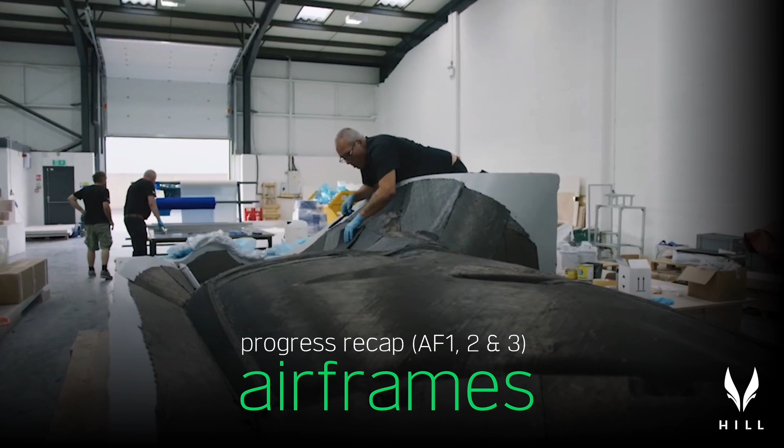So Airframe 1 was very much about making sure we could use Infusion to develop cost-effective composite aerostructures for HX50. That's key to unzipping the power of composites at a price point that GA can afford. So this first fuselage was about: can we stick the dry carbon fiber into the molds, can we hold it in place, and then can we distribute the resin around the mold effectively?

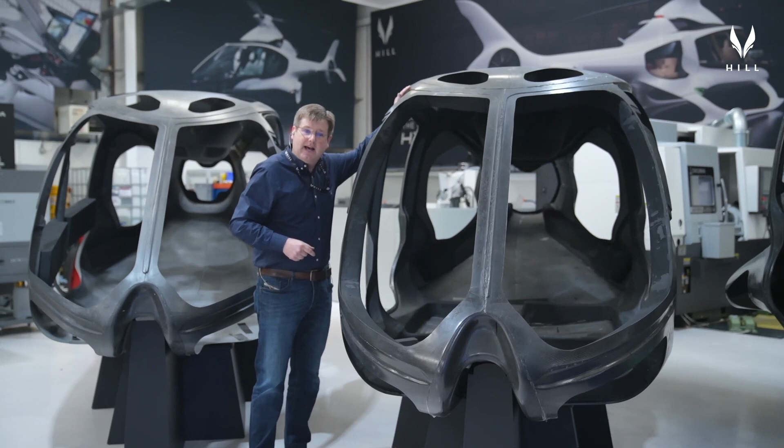We did that, and then with the second airframe, we moved on to try and improve the detail in the molding. So trying to resolve things like edge details, and starting to look at how we template and how we position the foams and the B surfaces into the mold.

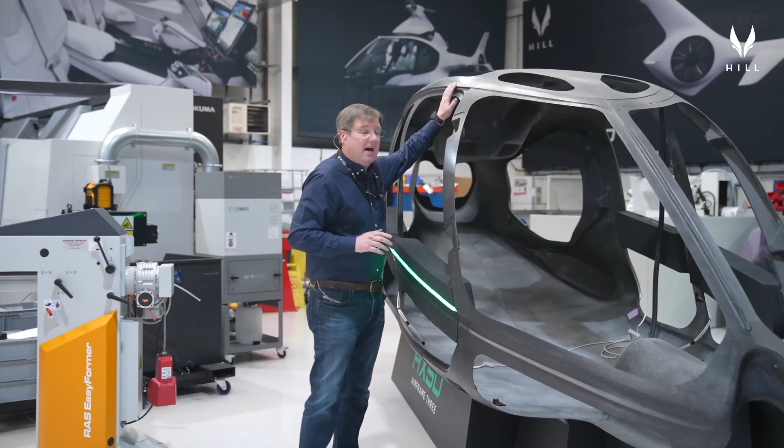The third airframe then allowed us to perfect that process on the outer skin. So by the time we'd got to the third one, we're resolving the edge details and all the intricacies of the carbon structure to production standards.

And then with Airframe 4, that was where we were due to bring all of the elements together. So let's go back and have a look at what we did with Airframe 4.

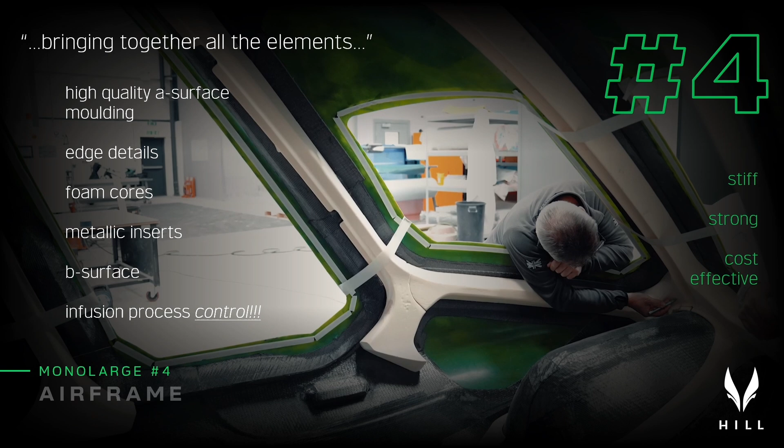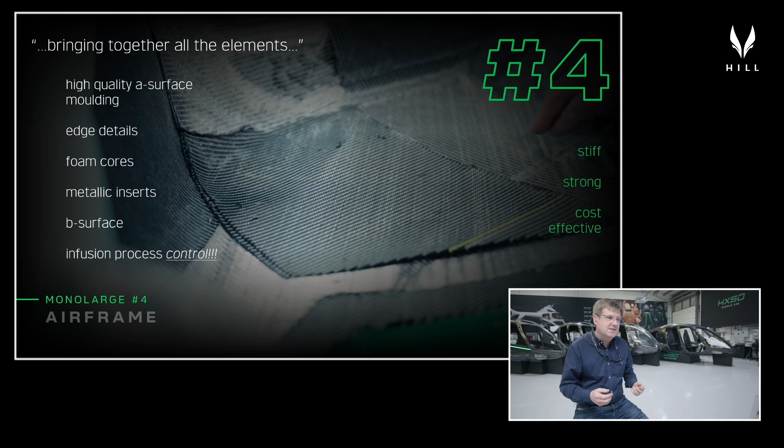So Airframe 4 really brought absolutely everything together, everything you needed to have a high quality, low cost aerostructure. All the edge details were in, all the foam cores were in, all the metallic inserts were in, the B surfaces were in there that give the structure its strength and stiffness, and then it was about perfecting the infusion control. We really refined the production processes to deliver what is a near perfect molding.

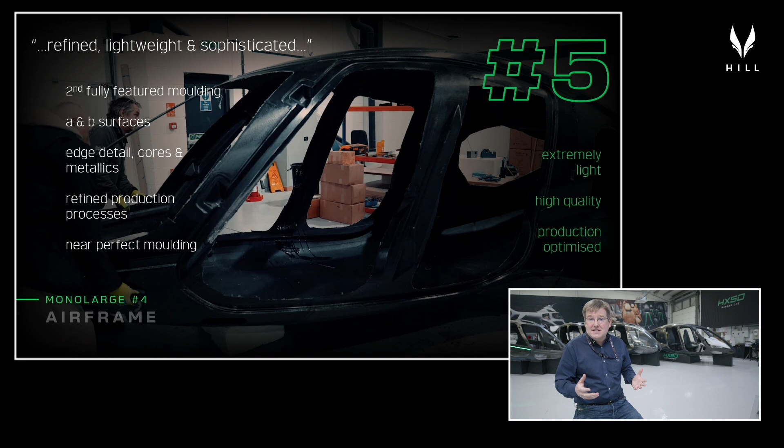And what we found when we got this out of the tool was this airframe is incredibly light. The whole monolarge with everything in there, the foam cores, the metallics, everything you need to attach all the mechanical components and whatnot is just 50 kilos.

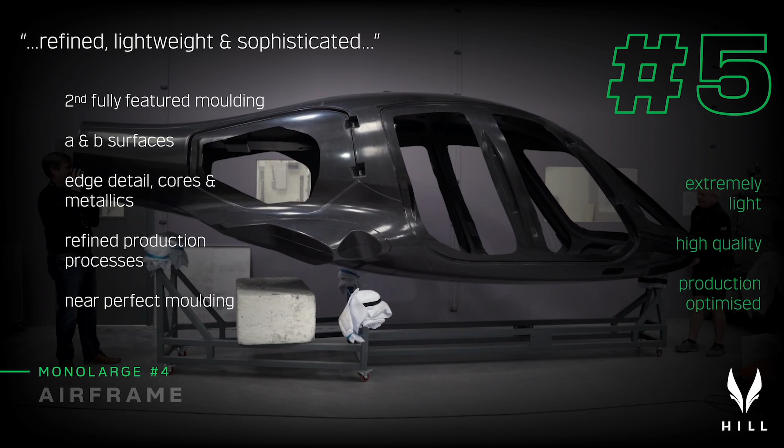Now, obviously it will put on more weight. We've got to bond in some internal panels to make the floors and the fuel tank closures. We've got to put doors and windows on it, but we are on track for weight, we are on track for performance, and we're now able to produce these moldings very cost effectively and very quickly, even without yet implementing the automation that will be used in production.

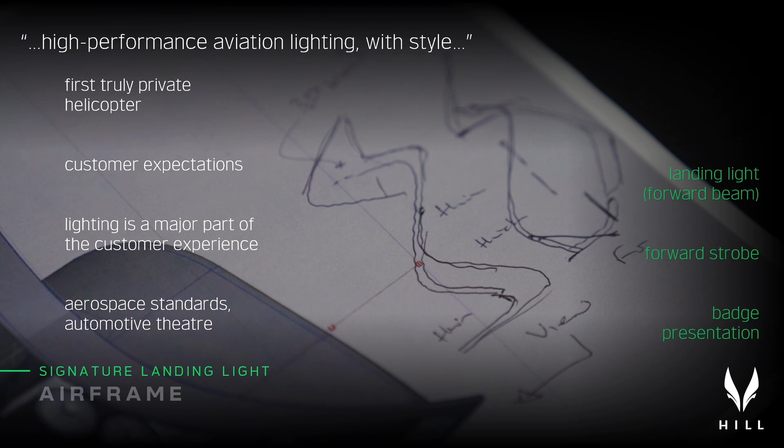One of the areas that we've been keen to excel in is making sure that we exceed all of our customers' expectations in terms of the presentation of the aircraft. And lighting is one of the major areas that we need to excel in to deliver this.

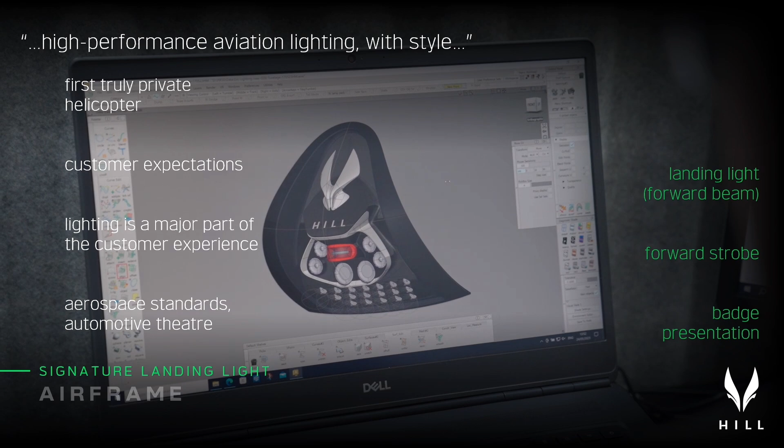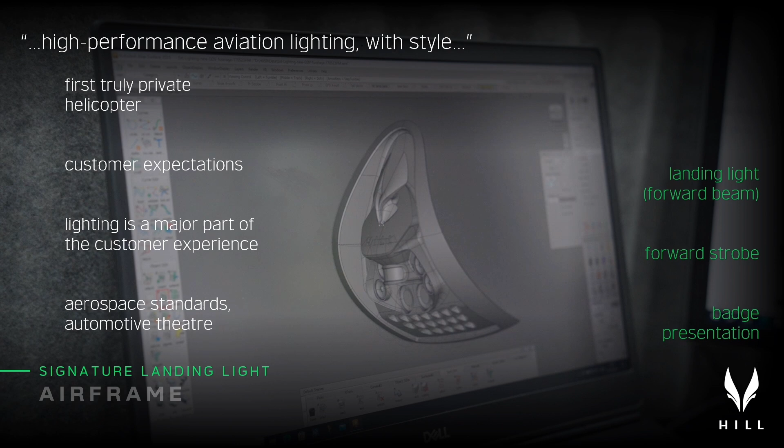So what we're looking at here is the nose cluster, which sits in the very front of the airframe behind the windshield. At the top of that cluster, it presents a 3D form of the Hill badge, and then below that you've got your dual focus long range and short range landing lights, which work in sympathy with the wingtip lights that provide a broader, steeper coverage.

Henry's been extremely busy over the course of the last couple of months refining this, fitting it in with the structural design of the aircraft, and working with Hayden, our optical specialist, to make sure that all of these lights are fully compliant with the regulations.

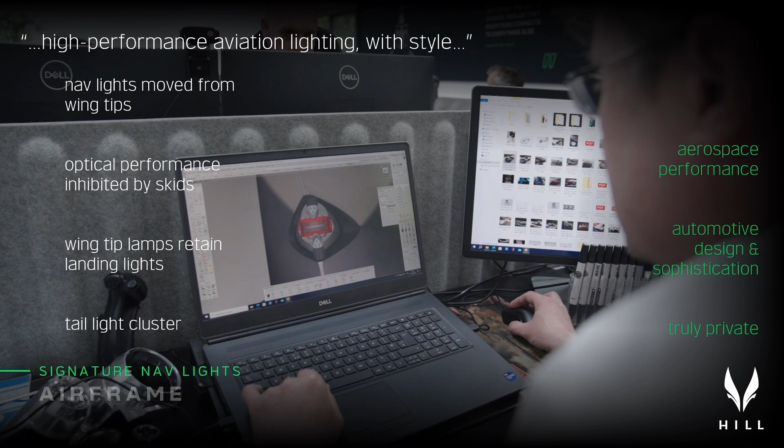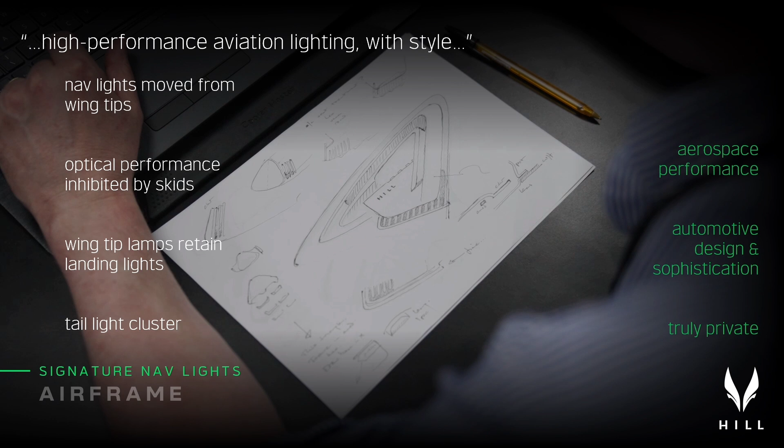What you can see on the screen there is where Henry's up to with the tail light at the moment. That provides both the aft navigation light and also the aft and lateral portions of the strobe light cluster. So again, aerospace performance, but automotive levels of design sophistication.

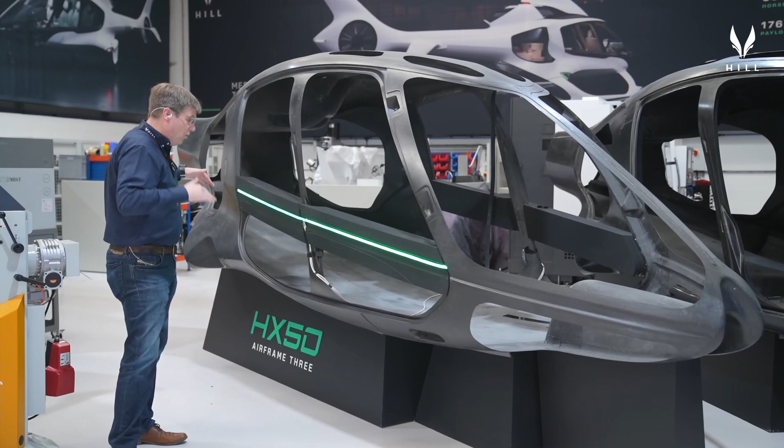What you can see here is one of the diffusive elements in the fuselage for the green navigation light. The idea is this light will be embedded in the door and the chin window here, and when you open the helicopter it'll draw down to the front as you flick the navigation lights on. It sits behind polarizing filters, so you don't get any stray light where you're not meant to. It works in conjunction with a primary navigation light that sits just down here to cover the range you can't quite get to with the stripe.

But the idea of this is it just gives you a completely distinctive signature when you're flying at night in the sky, and just brings the aircraft to life that bit more than a conventional bulb in a box would do.

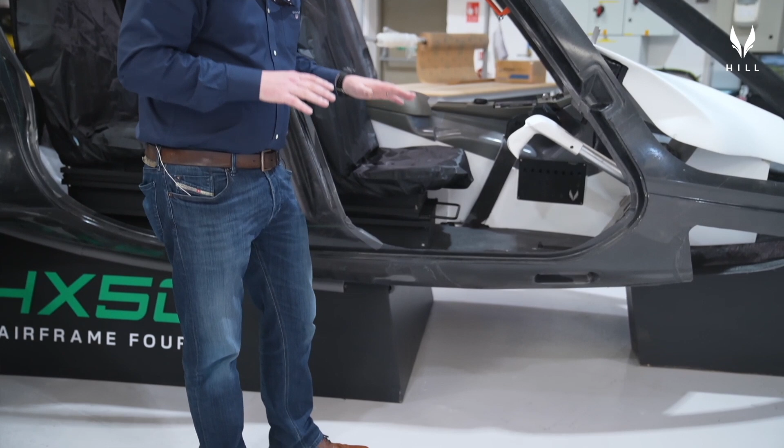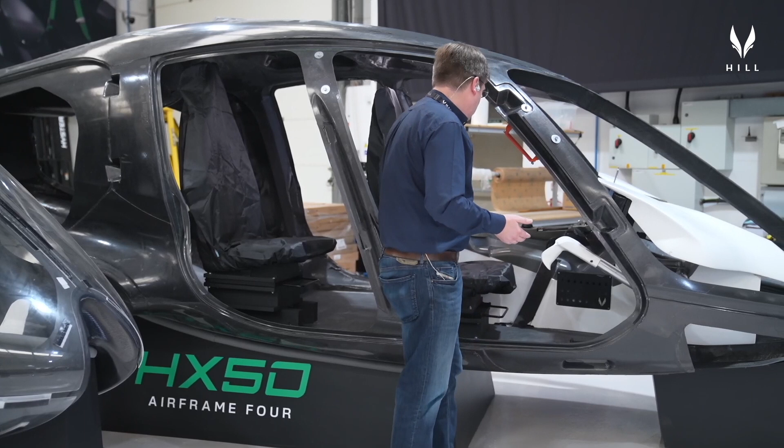This airframe has had its base cut down and sits at the actual height that HX50 will sit at on both wheels and skids. So what you can see, I'm 6 foot when I stand up straight, and the seat is at a convenient height for me and for people that would be a little bit shorter than me. One of the benefits of our Cyclic is that you can lift it up out of the way to slide in underneath, so access into the helicopter is comfortable and fairly straightforward.

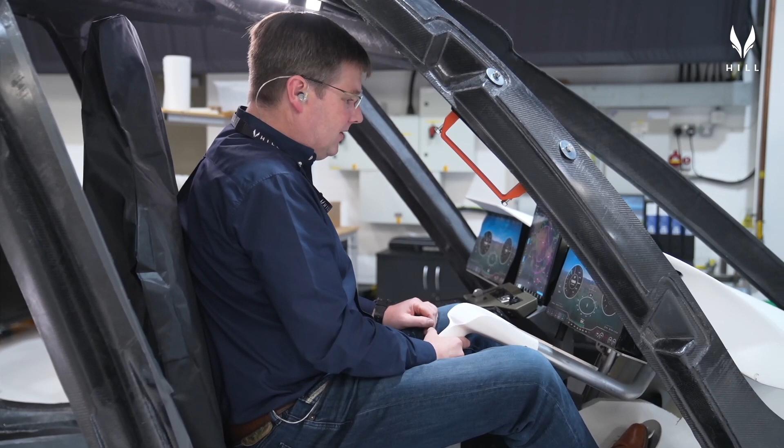The first thing that you realise when you get in is that everything we wanted to deliver in terms of that cosseting flying experience is delivered in spades with this. The digital cockpit looks absolutely fantastic.

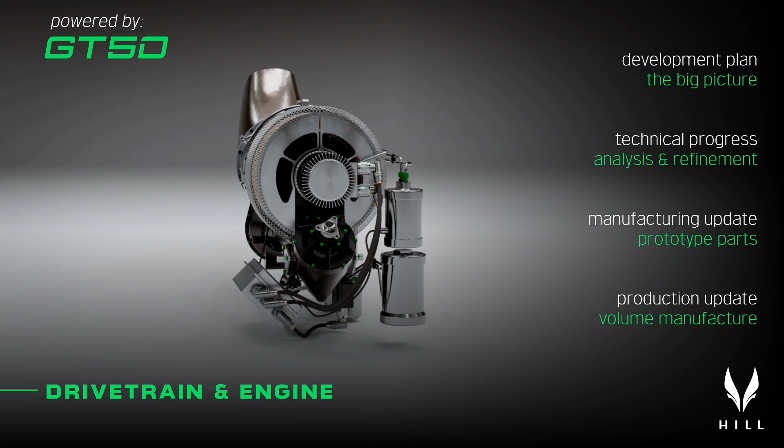Okay, let's talk about the GT50 engine for a second. A lot of the effort in the company has gone into the GT50 engine development, in particular the march towards freezing the final elements of the engine, getting the engine components built, and then getting a phased build of the engine and release to tests. So the way that we're going to do the development testing of the engine.

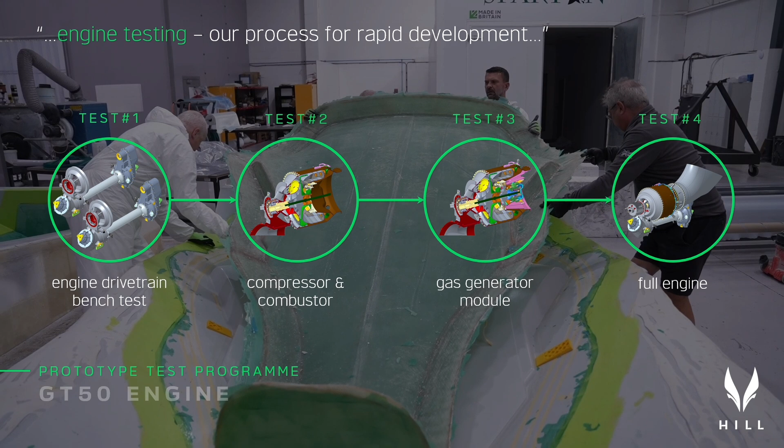This is the testing that just proves that the engine works. There's obviously a plethora of certification testing that comes later, but this is how we're going to get the engine to the point that it runs, that it works, and that we've proven it's reliable.

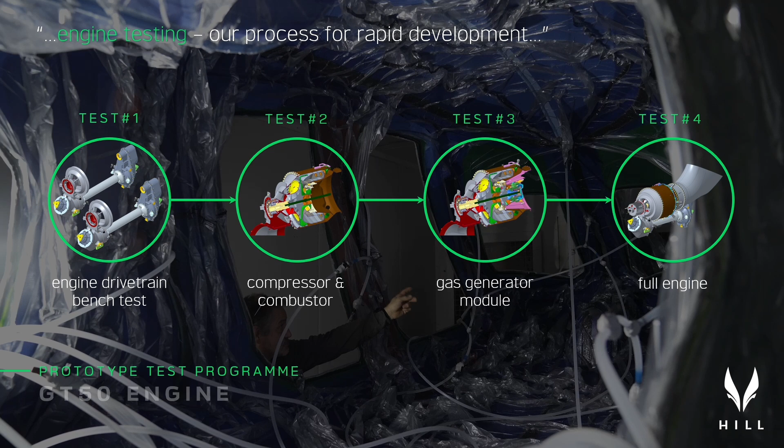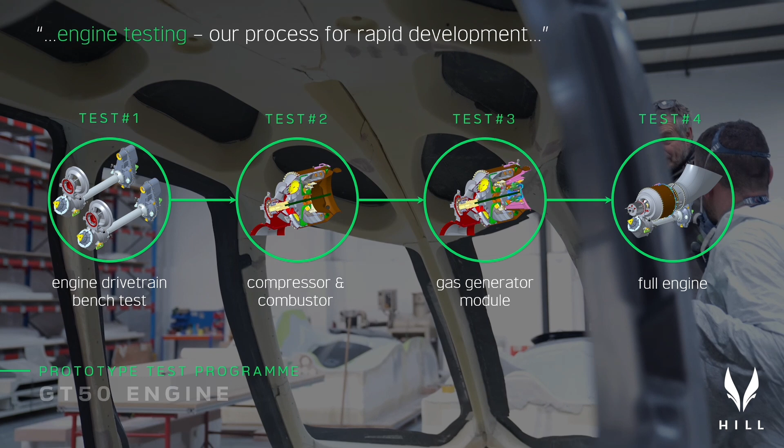The first stage of testing will be essentially to test the starter generator and the mechanical drivetrain that takes the power from the power turbine, reduces it down to 6,000 RPM, and then squirts it into the main rotor gearbox. The reason for that is those components are actually the bits that are furthest advanced within the manufacturing cycle.

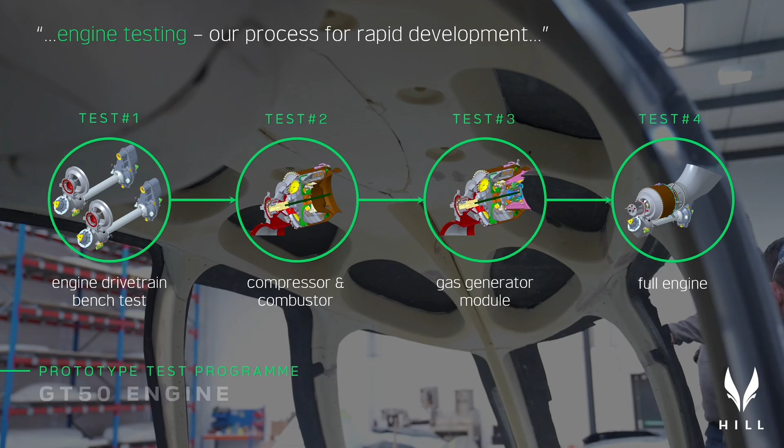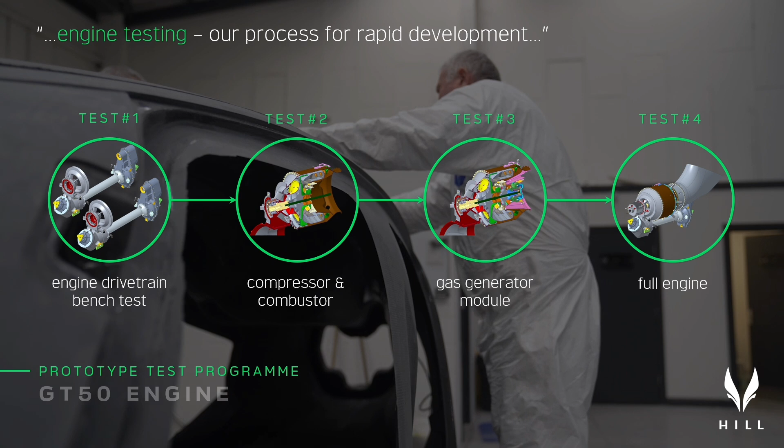Once we've done that and we've proven that the combustor works, the fuel system works, the igniters work, the compressors work, and the bearing and lubrication systems work, we then pop the gas generator module onto the back of the engine, and we essentially have a jet engine. That allows us to run the whole gas generator module throughout the operating range. It'll function at that point like a jet engine rather than a turbo shaft, but it allows us to qualify the main working core of the engine.

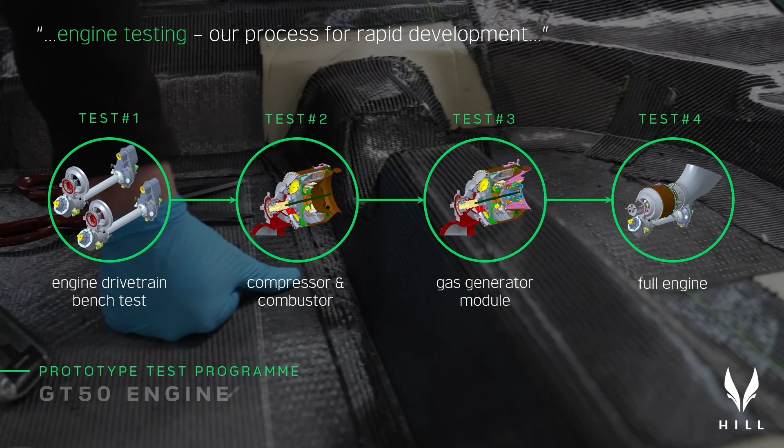The next stage is then to attach the power turbine, attach the drivetrain that we've already proven, and then you have a full GT50. This is the program we're working through at the moment. We're building the components for test on the engine drivetrain. I'll show you shortly where we are with releasing the other components for the gas generator section, and the equipment is now here to build those parts.

So what we have here is the current impeller. Again, you've seen us make that over the course of the last few months, so extremely high grade of aerospace titanium. This meets all of the required tolerances. It's both aerodynamically and structurally where we want it to be for the test engine.

We've also developed all of the labyrinth seals and the curvic couplings we need to align the shaft. We've gone from our two-stage cast Blisk gas generator turbine to the single stage bladed disc.

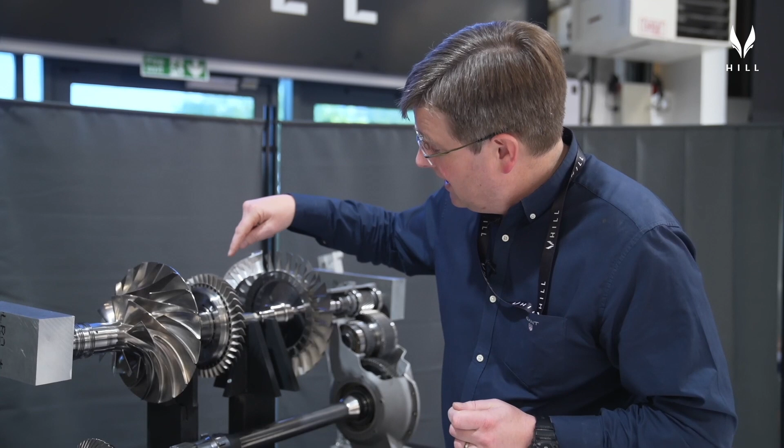So this is the new turbine. You can see the bladed disc in there. We've got a new sealing plate here that also retains the discs in place. And then if you look from the rear here, Josh, you'll be able to just about see the fir trees in there that retain the blades axially.

So that's the gas generator rotor, and this turbine itself produces around 1,000 horsepower that we need to spin the compressor up at 46 to 50,000 RPM. So that's all coming along very nicely.

Those components, as you can see, are mature, and the only thing we've got to do is substitute these prototype blades now with the cast ones. The other processes here are completely representative of our production intent.

We've now also got the power turbine, the low pressure power turbine. Again, it's moved over to a bladed disc. This has been manufactured using the wire eroding processes that I've just outlined to you, so machined here and then wire eroded.

We've cleared the geometrical accuracy that we need for the fir trees themselves, and we're just waiting for the final sign-off on the metallurgy of the fir tree to validate what we've done here.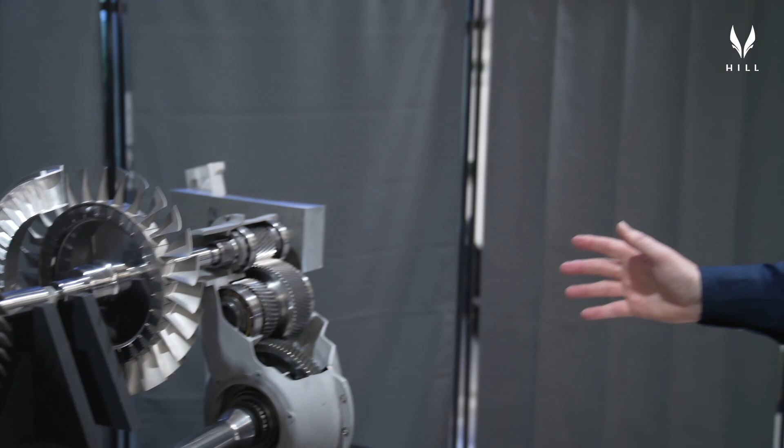And again, these are the new turbine blades that we've developed. You'll notice a very, very slender, high-performance aerodynamic profile, much thinner than we have started with on the cast power turbine. And then importantly, what you can see behind me is you'll be aware that we've been manufacturing the high-speed reduction gearbox now for some time.

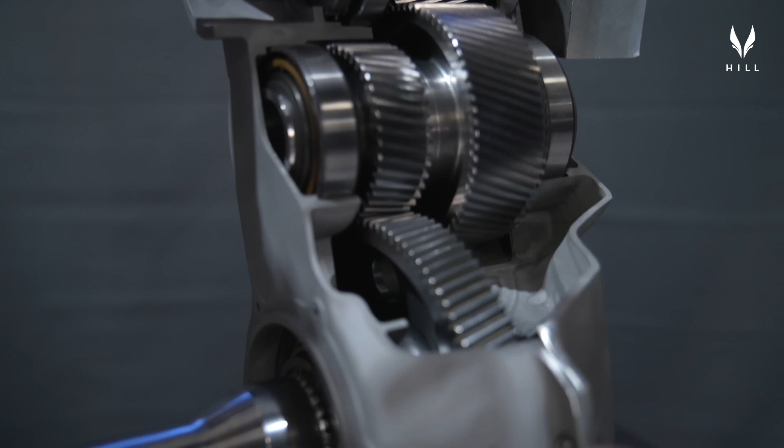So all of these components in here, the gears and the drivetrain components, are manufactured here. And this is the speed reduction gearbox that essentially reduces the power turbine output from 36,350 RPM down to 6,000 RPM on the output drive shaft.

And so as this thing's whizzing around generating your 500 horsepower, that pops out at the front here to go up to the main rotor gearbox at about 6,000 RPM. So really pleased with how this is coming on.

In the interest of doing this demo today, these are our gears, but we've had some cases rapid prototyped because we hadn't got enough capacity on the 5-axis, but we'll be replacing those cases with our own shortly. And again, we're then getting ever closer to being able to get a pair of those strapped together and run the endurance test for the drivetrain gearbox.

Over the course of the last month or so, sales have continued to be very strong. We're now up to 830 sales with 673 X's and 157 C's. So again, if you really want one of these there's no time like the present, because the further we get down the development route, the more potential we're going to unlock within our vast sales pipeline.

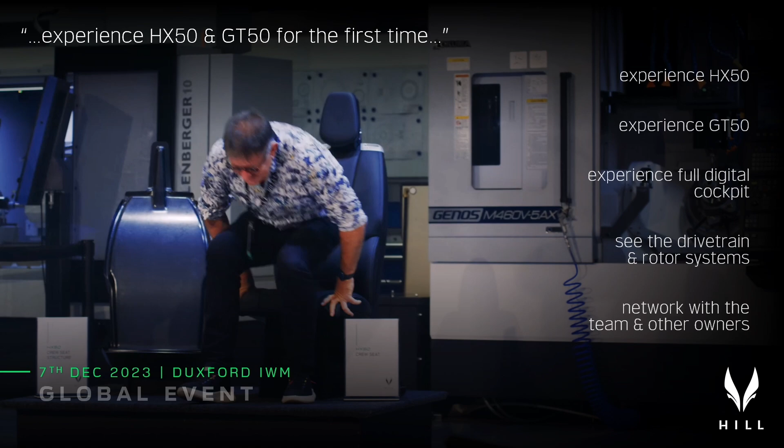When you come to the event, you will be able to experience HX50 for the very first time. You'll be able to sit in the seats, you'll be able to see the lines of the aircraft, use the digital cockpit, and experience what it's going to be like to own one of these for yourself. You'll also get to experience the GT50 engine for the first time and the fully functioning digital cockpit operating on target hardware.